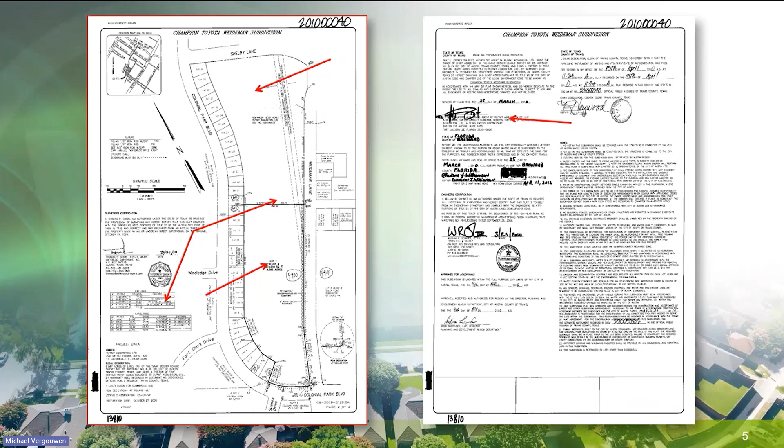Now, if we go back to where we were in the presentation, that's it. Those four requirements are the minimum requirements necessary for a plat to be approved. And if a plat does meet these four requirements, it statutorily must be approved by the governing body.

Keep that in mind, and I'll point out that Chapter 212 does allow a city to adopt additional ordinances to regulate the process, but it does not give those cities the power to regulate land use. It still falls short of that—the exception, of course, being the Houston area.

So what happens if a developer does not comply with the legal requirements of the land subdivision process? Well, there are both criminal and civil penalties, and the city can come after you for monetary damages in order to complete the project.

But perhaps the most important tool a city can use against somebody not in compliance is to simply deny the approval of any construction permits. This includes utility companies like electric, gas, and water providers from providing services to a building or property which has not been legally subdivided.

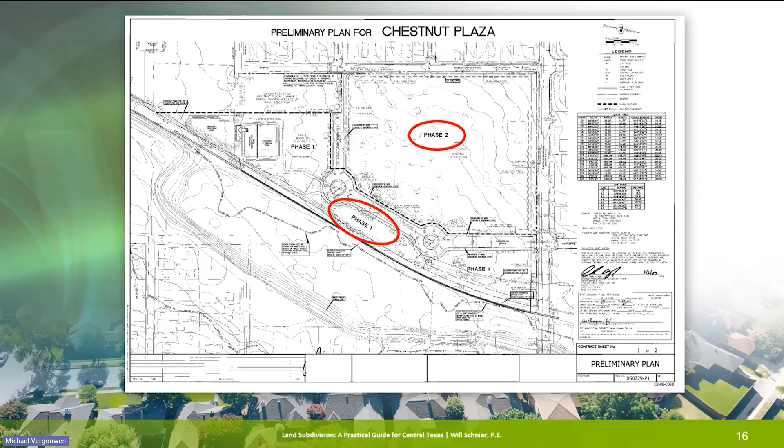You can see the red circles around the phases. I'll show you the corresponding final subdivision plats, which came out of this preliminary plan, in a moment. So two final subdivision plats came out of this single preliminary plan.

As I mentioned several times already, a final subdivision plat is a legal document. We talked about the minimum legal requirements that a plat must meet. So what else should you know about the process?

One important thing to know is that once a final plat has been recorded, practically speaking, it never expires. It's valid forever unless it's vacated or otherwise changed by the property owner. There are some very limited exceptions if you dig deep into the code, but in general the exceptions would be triggered after 50 years with nothing having ever been built on the property.

Another useful item to know is that once a section of a preliminary plan has been final platted, the underlying preliminary plan section, and only the section that has been final platted, is considered null and void. The effect is that once a final subdivision plat is recorded, you can amend the platted lots or re-subdivide them without needing to go back and revise and seek approval for the original preliminary plan.

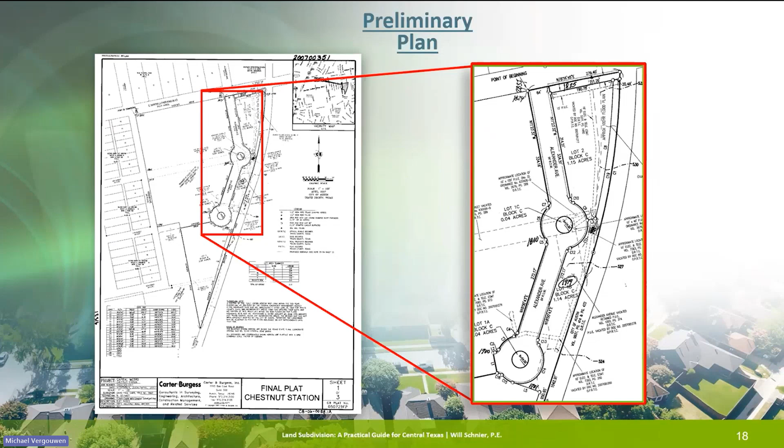You can see on this final plat, this first page of the document, that the land has been located with respect to the original parent tract, and it states the exact dimensions of each lot and right-of-way area.

The second and third pages of the same final plat demonstrate the other two statutory requirements: the metes and bounds description on the left, and an acknowledgement by the property owner on the right. This is the second section, Chestnut Plaza, which was final platted as Chestnut Station Section 2, just for reference. And of course, if we went through, we could show that it meets those 4 minimum statutory requirements.

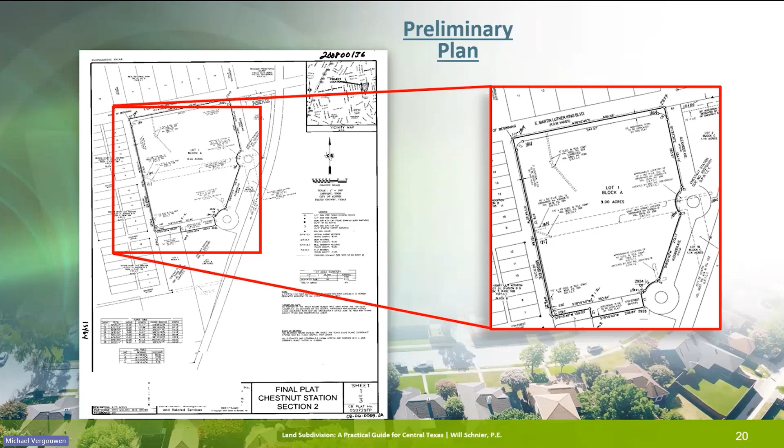So if you've made it this far, thank you. This slide, I think, would be one of the most important slides for a developer or a client of WGI's, or a practitioner who happens to be listening to our webinar today. This is what you don't want to show on a final plat, and why.

You never want to reference zoning-related information on a final plat. This would be things like building setback lines or density limits and the like. The reason is that once shown on a final plat, you're stuck with them as development regulations, and there is no way to get these items taken off the plat without vacating the affected lots, which can be a very cumbersome and difficult process.

You should also avoid dedicating mid-lot easements with the final plat itself. Instead, dedicate those easements using a separate document and reference the document number on the final plat. Spend a couple hundred or a couple thousand dollars to dedicate mid-block, mid-lot easements using a separate instrument, and show them for reference. You can go back and vacate those easements or move them around much more easily than if they were dedicated by the plat itself. It is much easier to modify those separate easement documents than to vacate a recorded plat to accomplish the same goal.

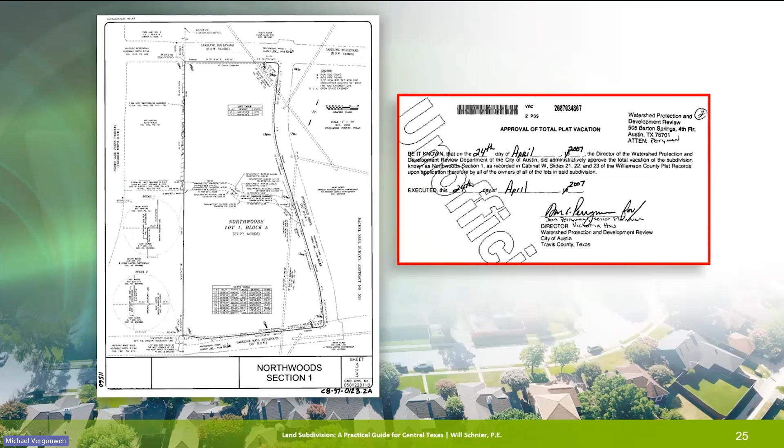So here's a sample of a plat vacation document. This was a one-lot subdivision, which was vacated in its entirety. Here's a close-up view of the legal vacation documents. The highlighted section states that the plat vacation destroys the force and effect of the subdivision plat, essentially making it null and void as if it never existed in the first place. And of course, the plat vacation document is a legal document and it is recorded in the office of the county clerk.

So now we get into some fun variations of final subdivision plats. The first one is a re-subdivision plat. The re-subdivision process allows the creation of multiple lots from one existing lot. All re-subdivision applications do require a public hearing. I'll say that again because it's an important point: all re-subdivision applications anywhere in the state of Texas require a public hearing prior to approval.

One note of caution here for developers and clients of WGI: often private deed restrictions or covenants and restrictions will restrict further subdivision of already platted lots and should be explored prior to considering an application. So what does that mean in simple terms? It means there could be deed restrictions associated with the property, not shown on the final plat itself, that say things like property within this subdivision may not be re-subdivided, may not be smaller than a specific size, things like that. So always review those deed restrictions or covenants and restriction documents that may be associated with the title of your property.

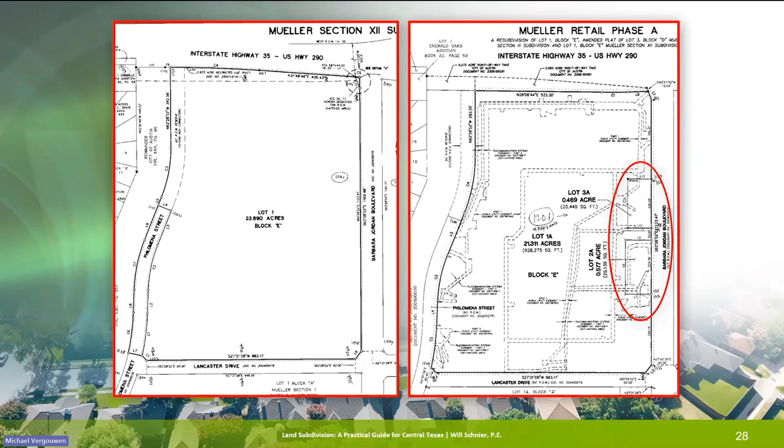Another type of subdivision plat is the amending plat, and this is a useful tool for landowners and civil engineers and lawyers and related practitioners. Perhaps the most helpful thing with an amending plat is it offers the ability to move lot lines between 2 or more adjacent legal lots without a public hearing. So an amending plat is not a re-subdivision, but it does allow you to adjust lot lines and move them around. So you can slide a lot line back and forth to make one lot larger and one lot smaller, or to move around a feature like a building that was put in the incorrect location, or drainage infrastructure, or things like that.

The city of Austin is sophisticated enough that they allow amending plats, and it's not usually an issue. They're very familiar with the amending plat process, but some smaller communities will balk at the idea of an amending plat because they've never heard of them or processed one. So in those cases, when you're in smaller communities or more rural areas, some level of education of their staff or their legal counsel involvement may be necessary.

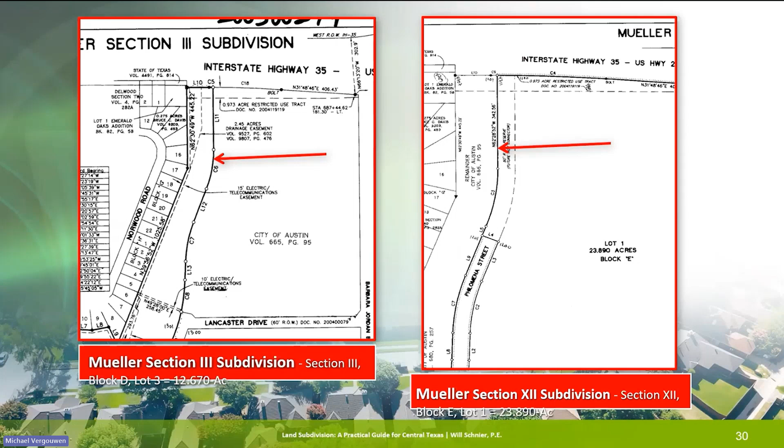So here are both the original final plats for two separate subdivisions. This is an amending plat example. Both plats show the location of the original lot line as indicated with the arrow, on the western edge. Post amendment, the lot line has been relocated to the other side of the property, and the acreages have been updated to reflect that. So in this example, an amending plat was used to move the lot line between two adjacent lots on two separate subdivision plats. Pretty cool tool to use.

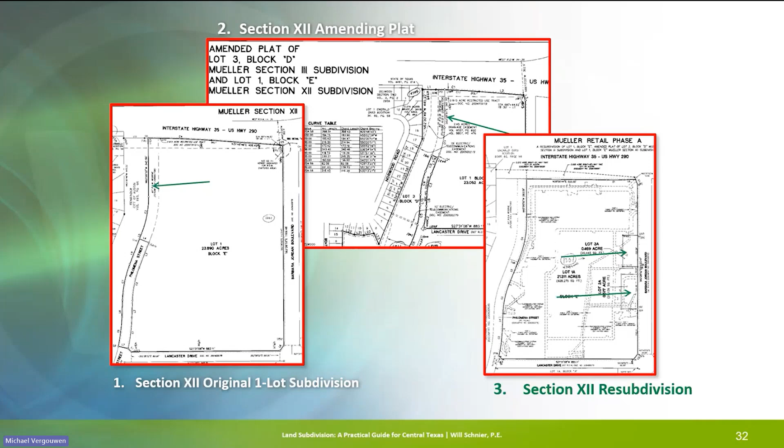So let's talk about exemptions and exceptions. There are several exemptions and exceptions from the requirements to subdivide allowed under state law. The two most common are the 5-acre exemption for cities and the 10-acre exemption for counties.

Specific to the city of Austin, there are several exemptions from the requirement to subdivide. First and foremost, any parcel which has not changed configuration since it was annexed into the city is exempted from the subdivision process. The most common city of Austin exemption is the 5-acre exemption. This exemption allows tracts smaller than 5 acres with existing utility service and street access to pass from the subdivision requirements if they have been in their current configuration since 1987 if in the ETJ, or since 1995 if in the city limits.